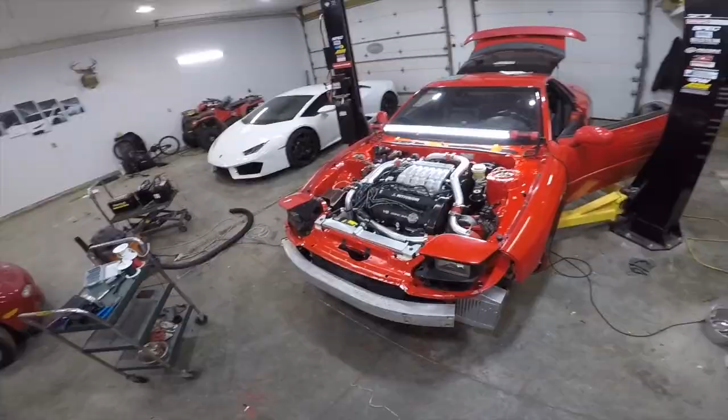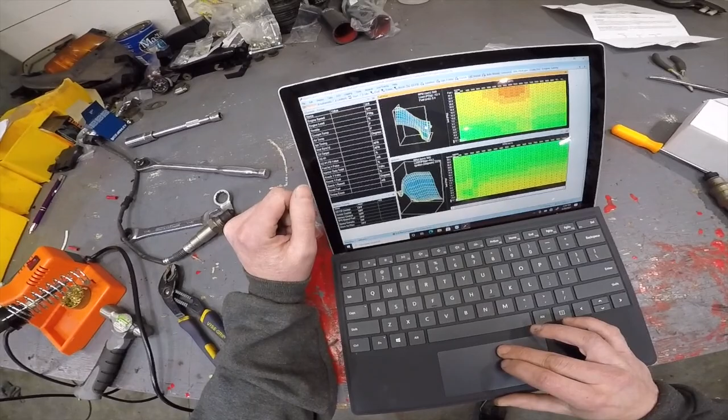What's up guys, back out here. I think this is a new video. I've been screwing around for 2 days pretty much trying to learn how to do maps, just trying to make up my own maps. Right here I just call this one dumb - this is the one my buddy made, so when I'm dumb I can go back to it and at least start from there. So I started from this map, this is his map that he has. Now you see how this fuel is just all stretched out? I made this map and tried to clean that fuel map up a little bit. These were all over the place. I think I'm learning how to do this.

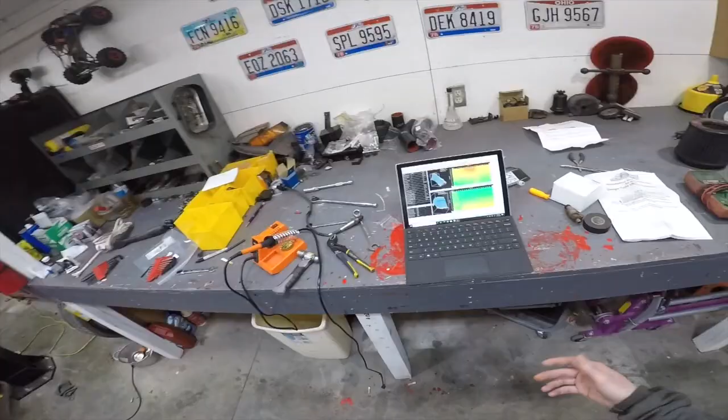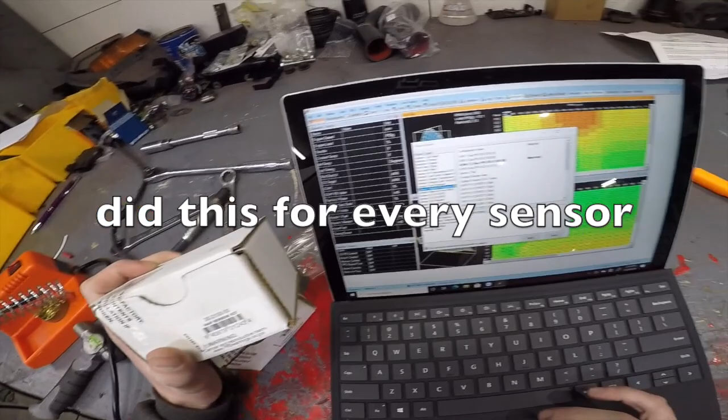So I'm gonna plug this in and make sure all these sensors are plugged in. I didn't do that - you gotta go in and make sure all these sensors line up with the part number. Manifold pressure map, let's see, 30, 21, 30, 50, that's matched. See if she runs.

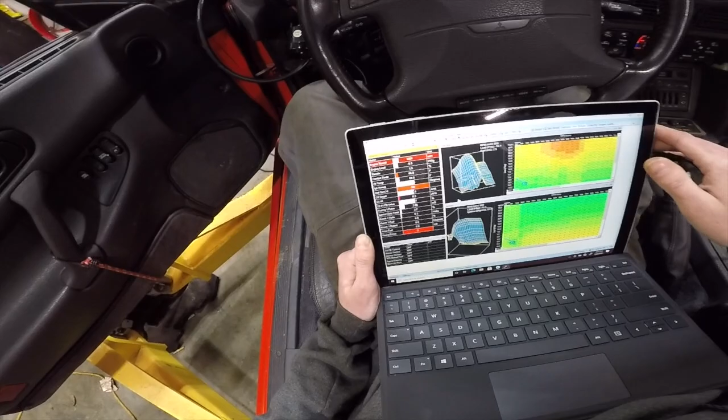Okay, she's really rich. So I kind of understand what I need to do - I need to bring the whole map down.

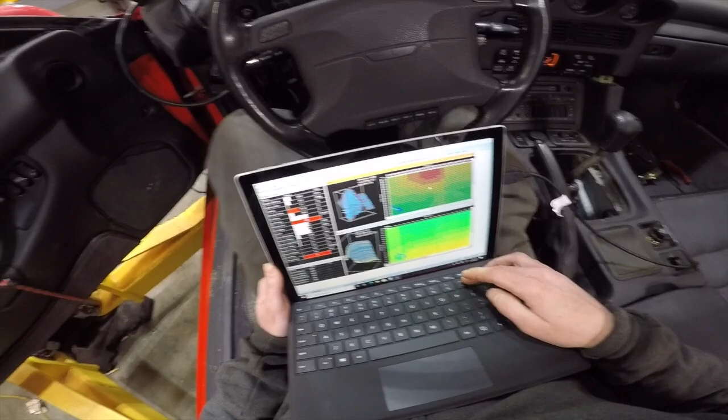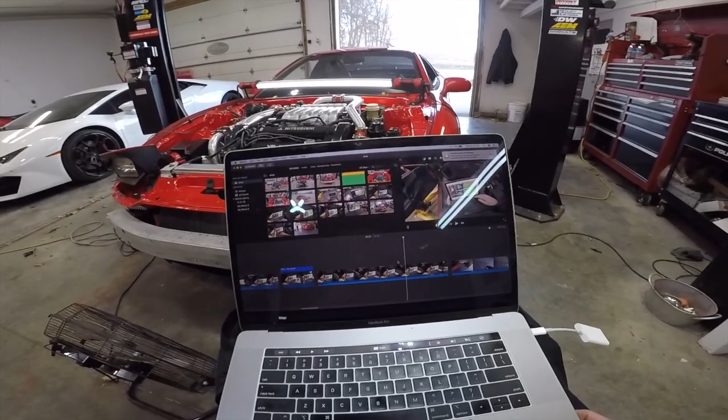I didn't know this at the time of this video that you're watching right now - there's a whole start map area on the AEM ECU. So you can set up your whole start sequence for temperature of the motor. You can have it deliver, let's just say, 50% more fuel at -4 degrees, and it kind of tapers down to the temperature until you get to 170, and then it's flat. It's 0% except for your map.

So that's why I was running really rich. I had to adjust that start table because that start table comes factory at 50% more fuel up to 60 degrees - so if the car is below 60 degrees, it'll add 50% more fuel. And I had to bring the whole table down. I don't know how much sense that made, I'll do a better job explaining it in the next video, I promise.

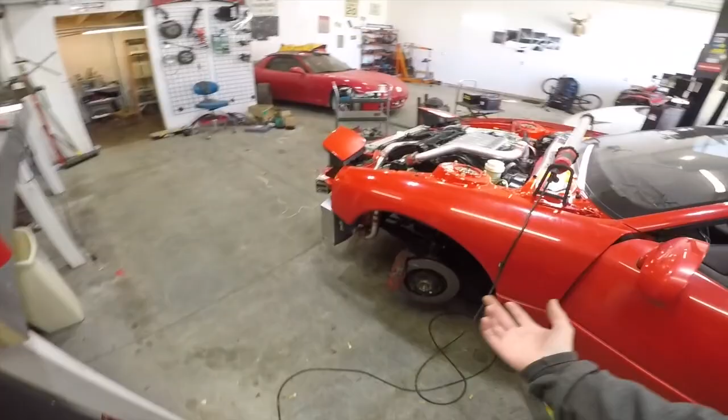At least it's running, I'm learning obviously. I made my own map and it's running. So I'm sure a lot of you guys aren't that impressed by it, but I am. It still dies as soon as you touch the throttle - I don't know if I gotta do something with ignition for that.

Okay again, right here too, there's a whole table for idle, so you have to set the idle. The car thinks I'm putting 5% throttle in right now. You have to set idle and throttle, and it had no idea where anything was. So every time you touch the throttle, it thinks you're giving it more, like 15% when you're only giving it 3, and it kind of just died on its face. But that's all fixed now - again, I'll explain more of it in the next video.

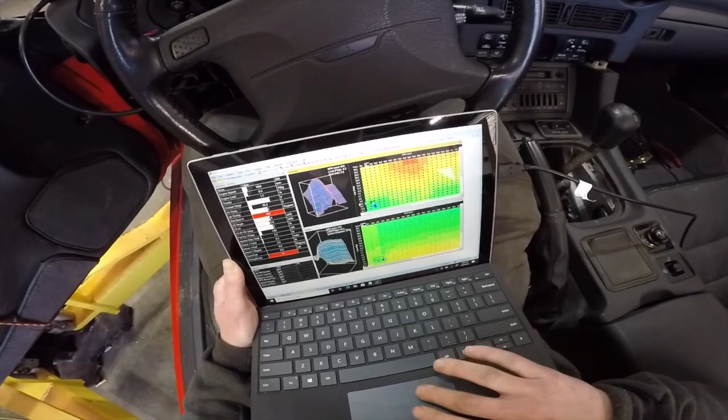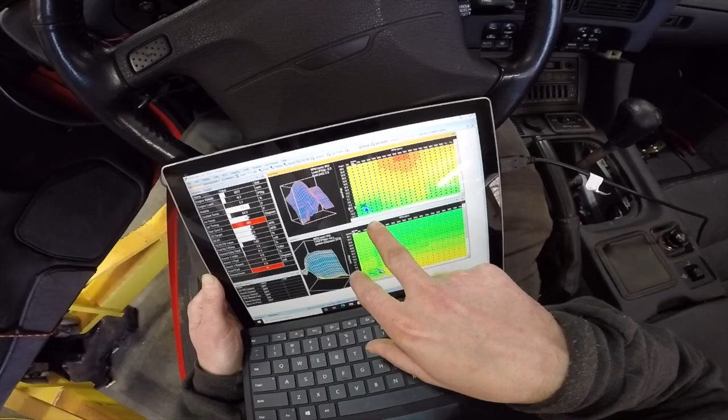There's a little square that comes up, I don't know if you guys can see this on camera or not, but when I hit the gas, right there you can see it dives up. So I got it now, I'm just adjusting these numbers one at a time. I don't even know if you guys can see these numbers, but before it was 2.2 and then jumped up to 2.6, so it probably died on its face - it just got drowned in fuel. So I'm kind of just trying to smooth this out.

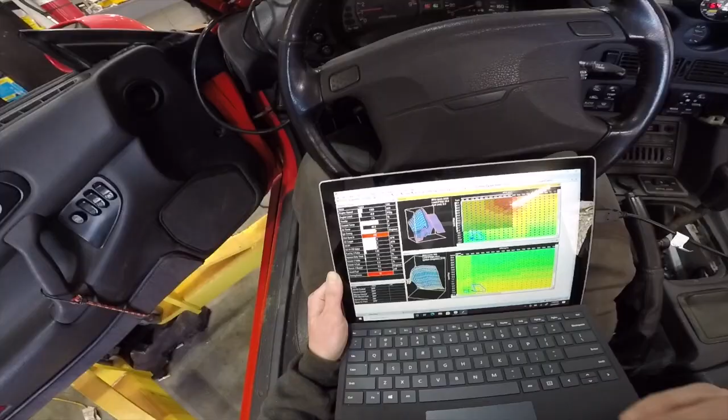This is why I go lean, because all this right here.

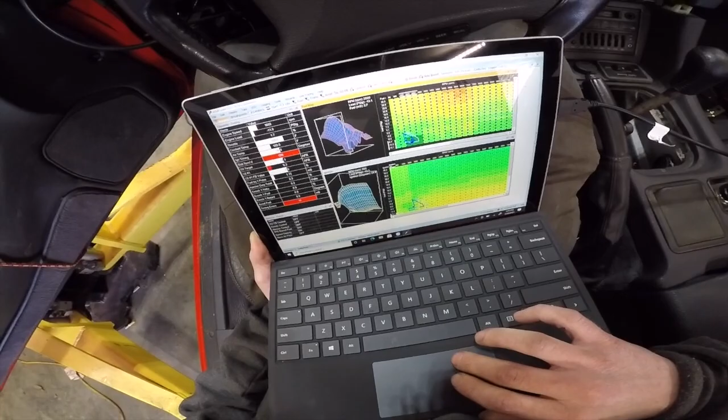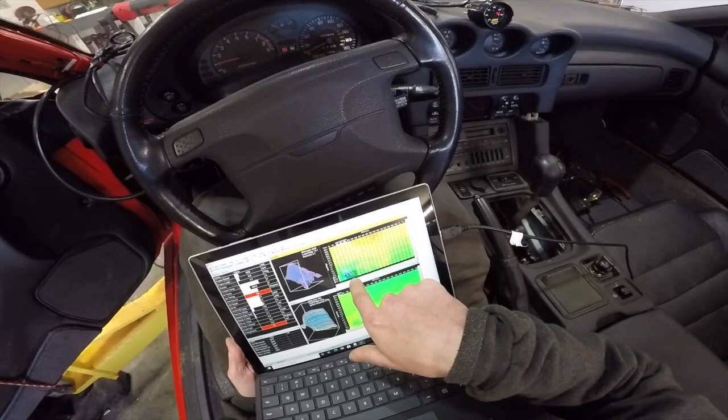There we go, I got some of the rev now. I'm learning this. I don't know if you guys can see, but it kind of just makes these lines, like it's not a straight line. So over here's my idle, but as it comes back down, it's over here, and those numbers were way high, so it just completely richened out, but up here was lower, so it leaned out. I don't know how else to do this besides doing one spot at a time.

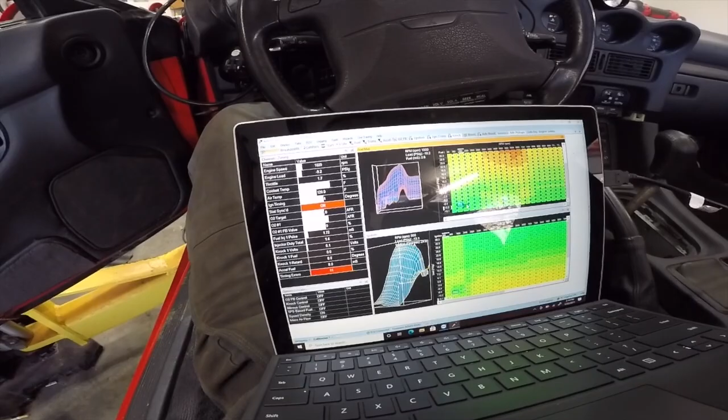I'm still gonna have a real tuner go over this, but I'm getting better. I got it sitting at like 14, 14.7, 14.5. It's going back and forth still. I don't like that it keeps changing on me.

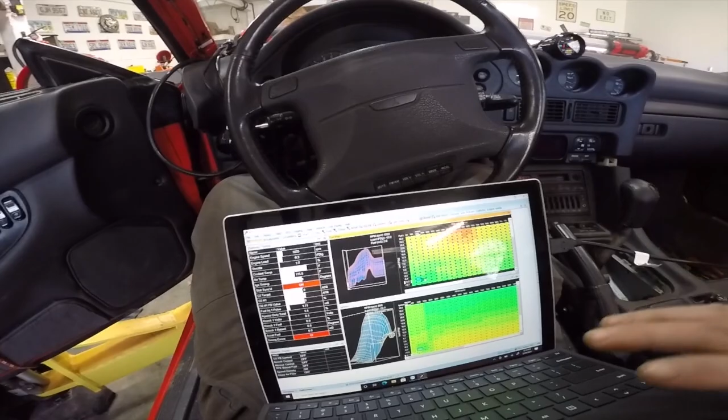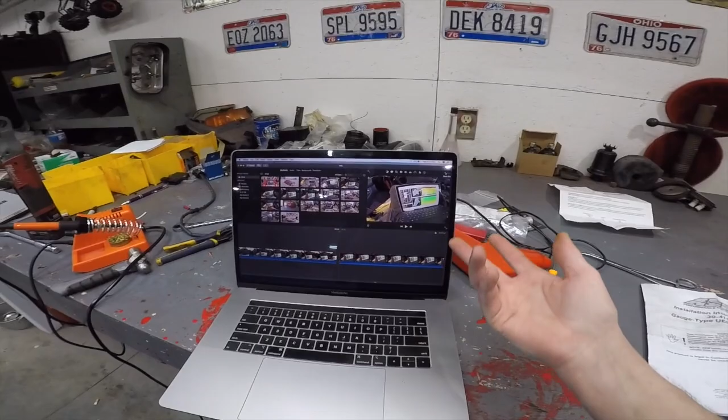It's doing that because of that startup table that I didn't know about yet at this point in the video. It's at a slope, so the car is giving itself, I don't know exactly what it's doing right now, but it's probably giving itself like 20% more fuel until the car hits 175 operating temperature. So I'm sitting here trying to pull fuel out to make it leaner, and then once it warms up, it starts getting lean because it's not getting that 20% more. So I'm pulling fuel out of this thing right now trying to make it perfect for no reason. It probably would have just ended up making itself perfect.

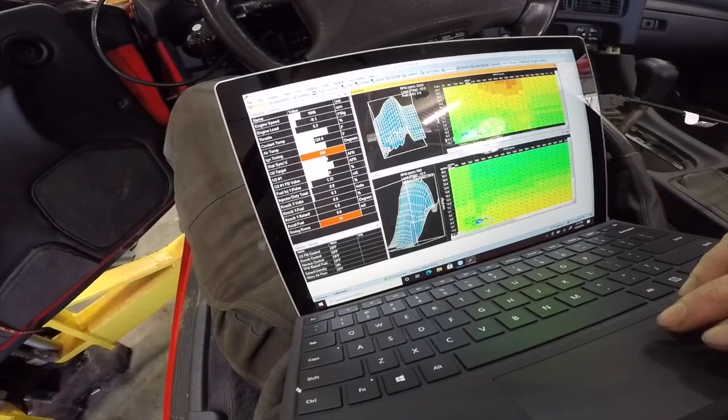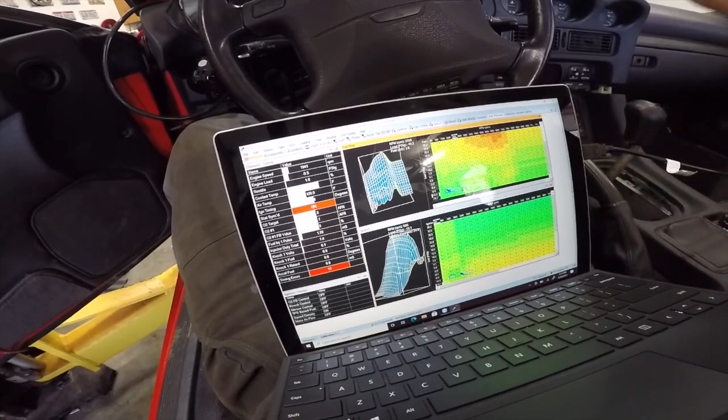There we go, I'm getting better. Just seeing that the line went over that way. And that was only at 3, the next one's 4, so I went to 3.6.

I'm getting better at this, but I gotta turn it off. You can come up here to Wizard. Alright, for some reason I didn't explain what I was doing here.

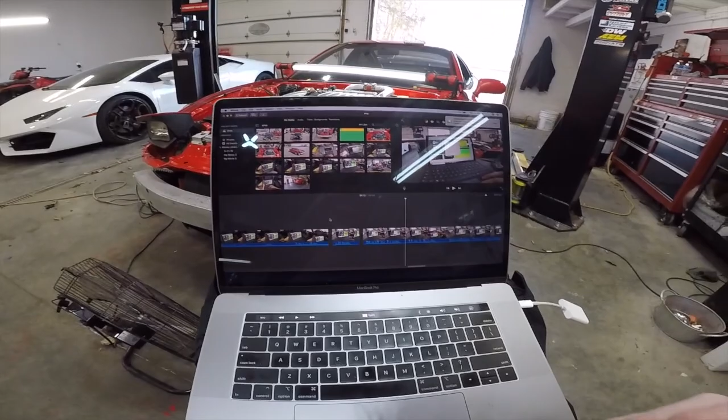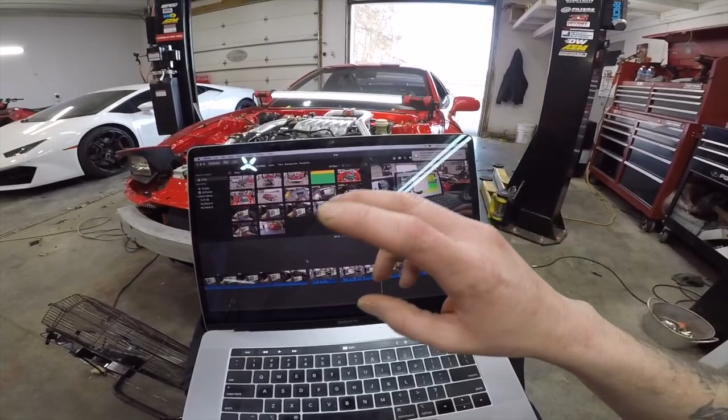You also have to set timing in the AEM. So you'll set the AEM to 15 degrees, lock it on the AEM, and then set your car to 15 degrees so the AEM and the car are the same. So when the AEM sees 10 degrees, the car's at 10 degrees. When it sees 20 degrees, the car's at 20 degrees. Hopefully that makes sense. Go to this, and then you can lock timing at 15 degrees.

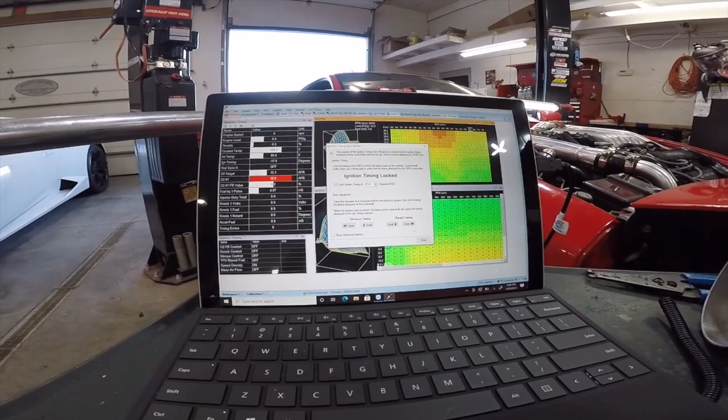Then start the car and adjust the timing on the car, because this ECU isn't like the old one. It doesn't change it with the pill and all that stuff. I hope I'm explaining this good, I'm trying. It's kind of been a pain, and I haven't been recording too much. There'd be like 9 hours of footage if I recorded me trying to learn all this.

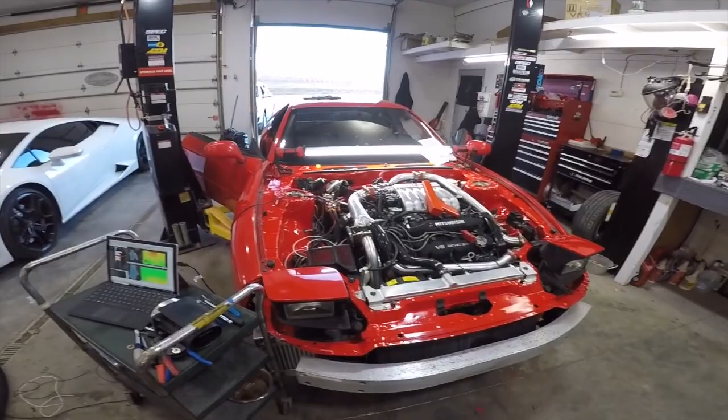So we're gonna start it up and put a timing light on it. Alright boys, I'm gonna start my own tuning company. I barely got this thing to idle, and I think I'm a pro now, so we're good to go. I'm so excited that I figured somewhat of this out.

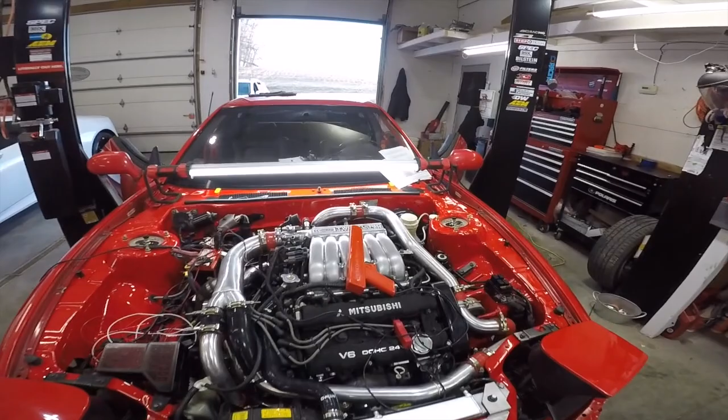I haven't had it on the street yet, so I haven't done anything with any sort of load. I don't know how that's gonna react, but I got timing. It's good, it's right around 15. The computer's right around 15, everything matches. It's not running rich, it's not running lean, it's not smoking at all.

Dude, this is sick as f***.